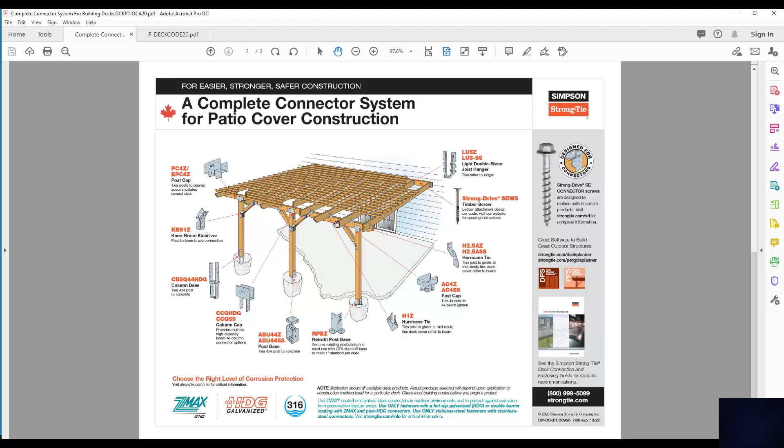So these different connectors, and I throw this in now, even though you're not going to really specify this until much later on, you have to become familiar with these connectors. What do each one do? Like a standoff post base goes from the concrete sonotube to the post. Now, you may not have a post here. You may have it right onto a beam. So it requires a different type of saddle connection for that type of assembly.

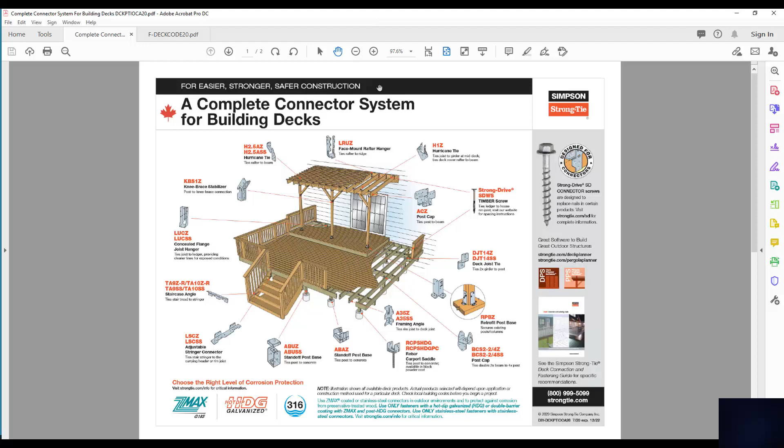Then we have our framing that goes from, let me zoom in on this so we can see it a bit better. We have our framing that goes from the joist directly to the beams, sitting on top. That's the one detail. The detail I was talking about earlier is we're actually going to have joists that come right into the side of the beam. So the two decks rest one on top of the other, but they actually don't. They're connected to the beam in two different ways.

So the connection down here is very similar to what we do at the house with the ledger connection. And the house connection, once again, has its particular elements that you must be aware of. There's connections with how we deal with handrails. Now, I've got a separate document for that. It's the exterior guard detail document called SB7. It's generated by the province of Ontario, and it's basically cut and paste.

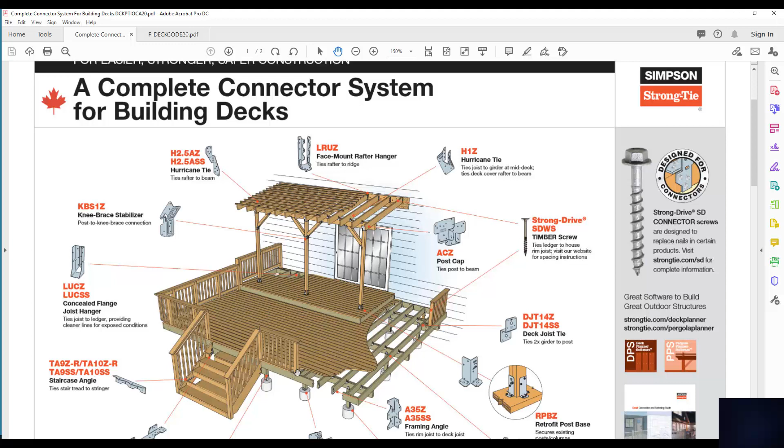You pick your different elements and you cut and paste the PDF file into your drawing, and you're done. And it meets specific guidelines. Now, Simpson Strong-Tie has connections as well, but we're not going to use that. We're going to be using the SB7 document. That's also part of Lesson 5 documentation.

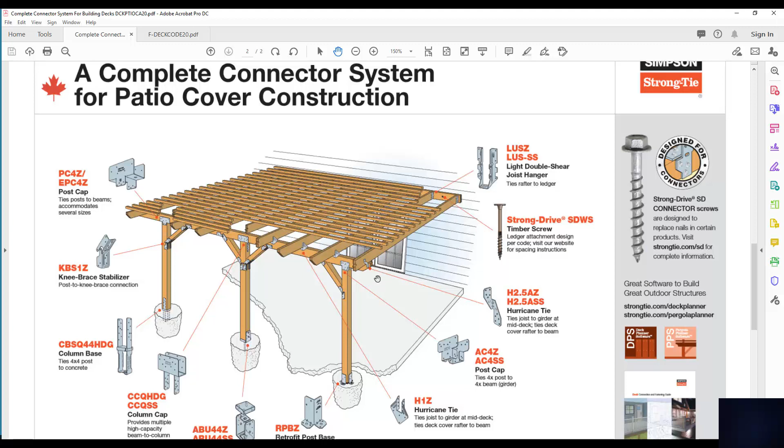And then down below here, let me just scroll up here. We also have different connections between posts and beams. These are another type of ledger, as well as when we get into the pergola. Now, some of these are really not attractive, let's just put it that way. But they do have a whole section in their catalog of very attractive connections as well, and that may be something that we'll look at decoratively.

You can see here where we have a step. I used in my example coming off the dining room, I have a step. Basically, you're building a deck on top of a deck, that's all. And that's what they've done here as well. So we'll look at that.

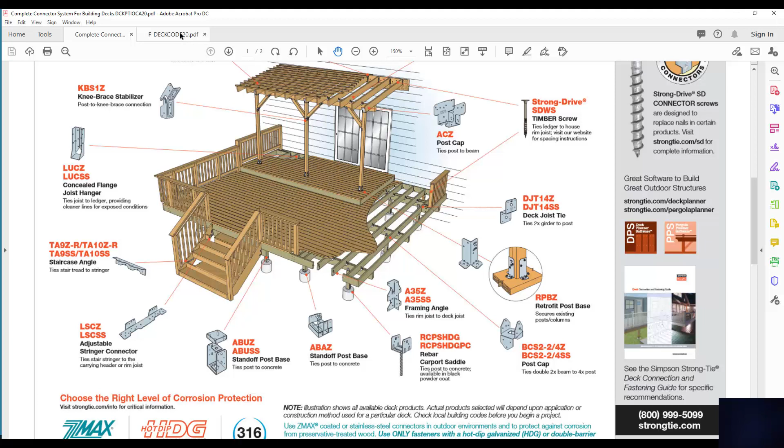The other document I've provided here is called the F Deck Code 20. So it's a brand new document for 2020. And again, it goes in a bit more detail with the connections and what they do. You don't have to study this, but you need to be aware and familiar with all the different parts and pieces of it, because we'll be looking at them, and eventually in your final project you'll be specifying them.

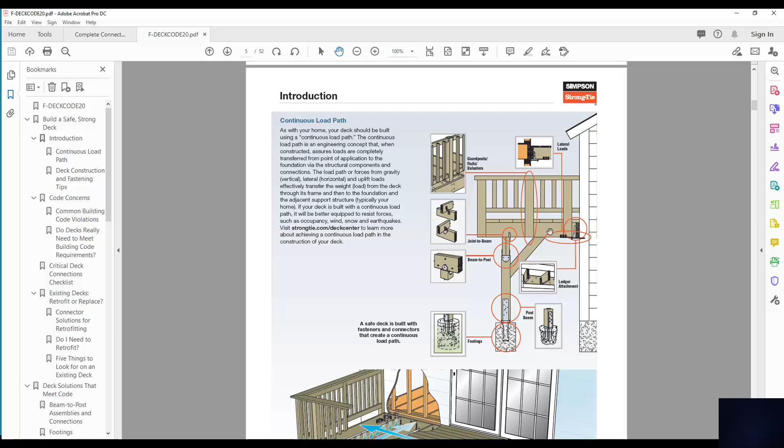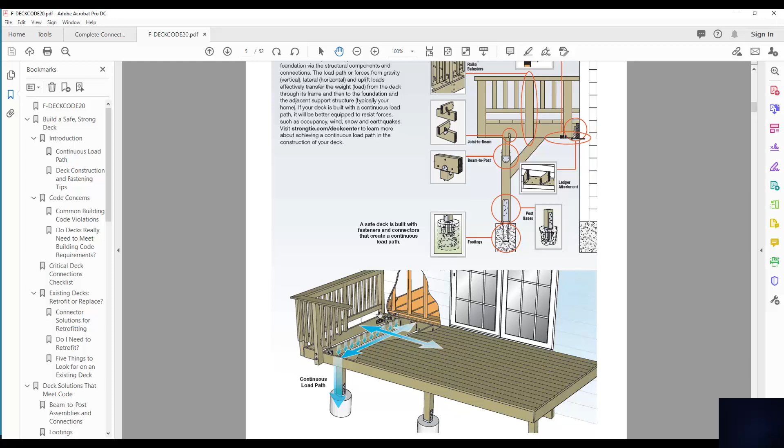So a lot of this I'm showing you now as different visual effects of the deck. We have to become very familiar with the three-dimensional aspects of the deck. So for instance, the board that runs along the house is called a ledger. The board that runs along the front as well as the side, we're going to call rim board. Sometimes there's a couple of different names for it, but the rim board is basically, as the name would describe, the outer rim of the deck.

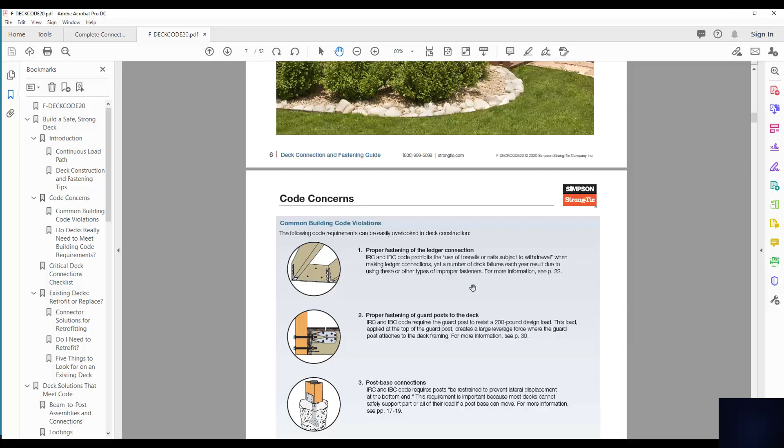And the interior components are the joists. So you can see here very clearly that this inner joist and the last board are exactly the same. So we do floor joist calculation for it, but the outer two floor joists are called the rim board. And you'll see in this document, like I said, it's far more precise. It gives all sorts of details of different connectors, including the one towards the house. Like I said, we're not going to spend too much time on that.

You need to understand that this connection, though, is extremely important, because what you're basically doing is attaching the deck to the house, and the house is acting like a beam. So when we do our calculations, where we looked at the last example, we know that the 2-foot overhang is part of the calculation for the beam underneath it. But the rest of the joist itself, we were dividing it in two, and the one half gets attached to the beam that you see. The other half gets attached to the house.

Now, there's no beam calculation for the house. The house is strong enough to carry any of those loads. It's designed to carry the maximum load, as long as this joist is less than 16 feet wide. So it's more the connection that we're concerned about than the actual structure of the house, whether it's strong enough to support it. It is. So that really doesn't become part of the calculation. But we do have to calculate halfway along that length and the overhang for the beam that supports underneath.

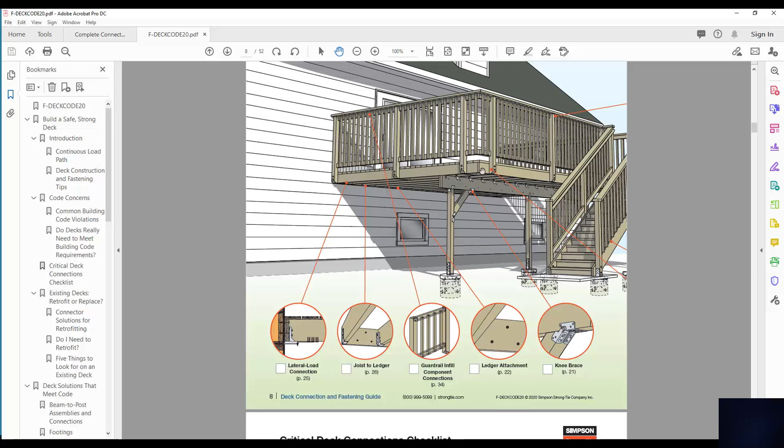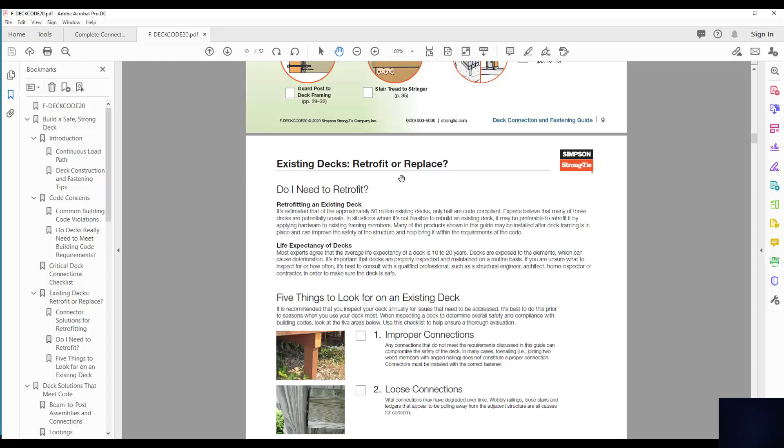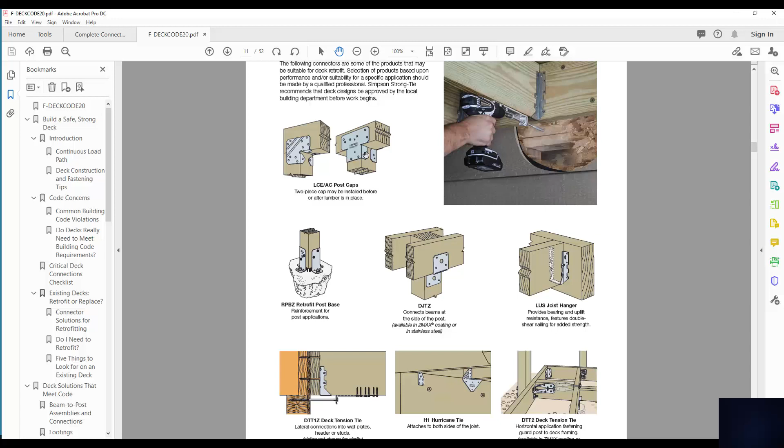So once again, these three-dimensional images will hopefully help you visualize what it is we're going to be doing with our project. And there's other things like cleats for stairs, steps, offset posts, but it's a good document to go through and become familiar with, because it has all the different deck connections, and most of these you can buy at Home Hardware, Home Depot, Lowe's, or anything like that. Their boxes are actually labeled Simpson Strong-Tie, so you should be able to find each and every one of them. They also have a software.

Now, I haven't explored the software, but regardless of a software that automatically does a lot of this calculation for you, you need to understand what the parts and pieces are before you can move on and use a software of that nature. So once again, this documentation is for your review. It's to help you further on in the project with how to actually make all the connections as part of the documentation and include them in your drawings. I'm going to show you how to go through the process. You know what? I'm going to pull that up right now.

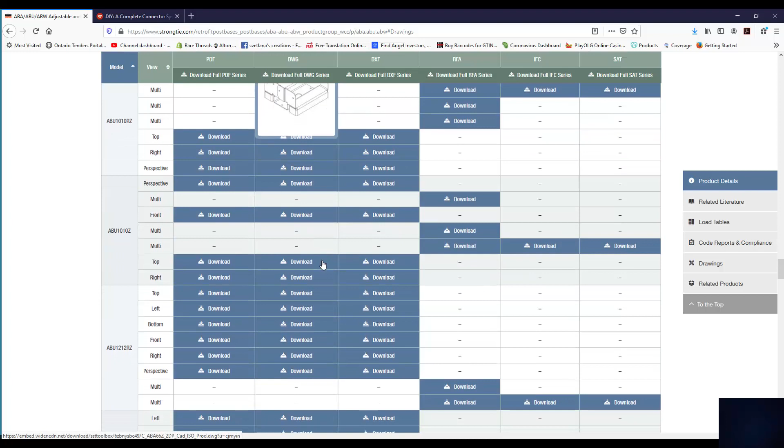Let's see here. So once you define a connector, let's say for instance you're connecting a beam or a joist to a sonotube, you'll then look it up on their website, and here's the connector there. And then on their actual website, they have CAD drawings. So if we click on the CAD drawing, we actually have the drawing specific to that particular item. So I know that I was looking earlier, and I want a, I think it was an ABZ 8.

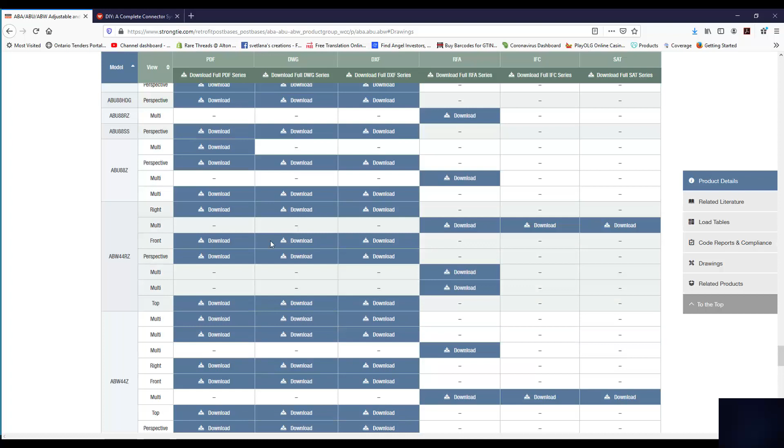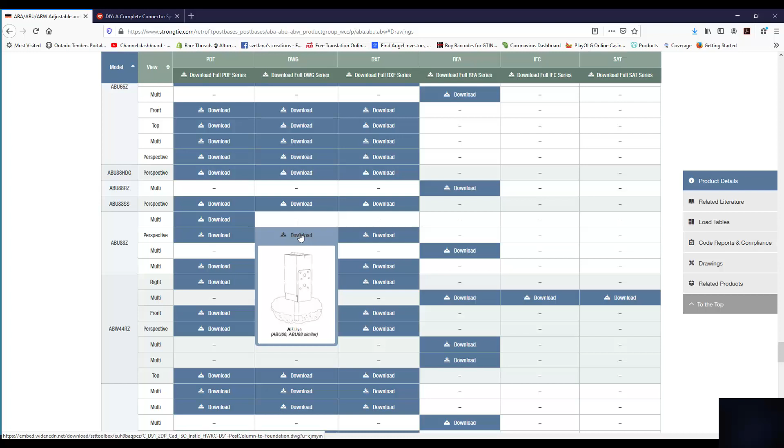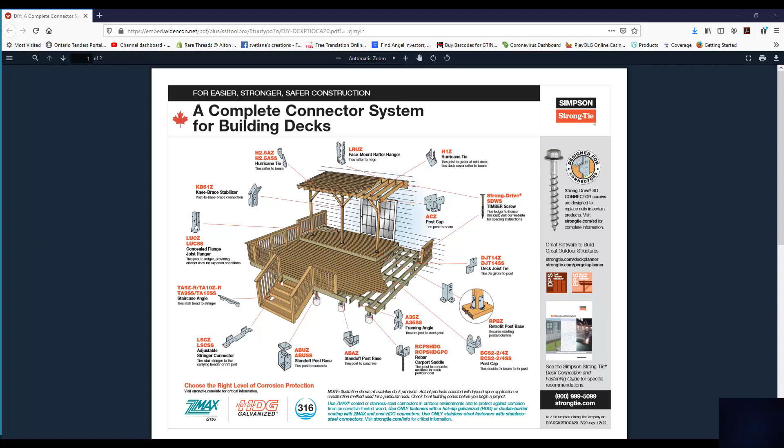And it's just a copy and paste, as we've used before in the first year of the CAD program. So we're going to look at that later on, but just be aware that it is here. Why am I doing this now? Because I want you to become sort of familiar with repetition of all these different elements that we're going to be looking at through the program.

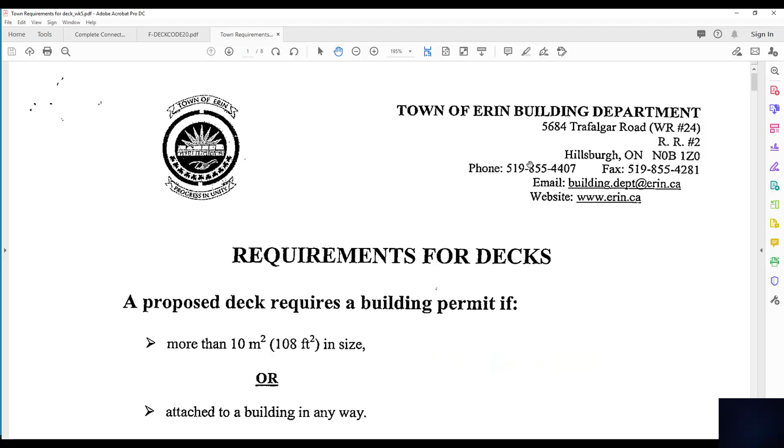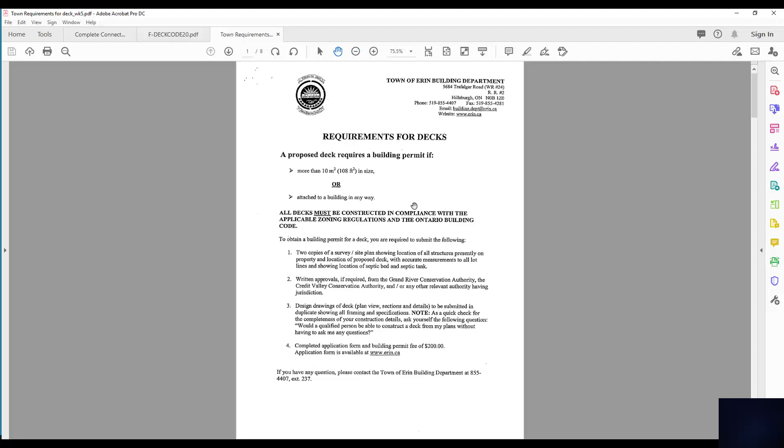So I'm just going to come into here and show you a typical town requirement. In this case it's just Erin, which is close to me here. If you go to the local building department, they'll tell you what they're expecting in their permit set. So this is giving you the minimum requirements before you require a permit and all that, and then showing you how to lay out the deck. This is particular to decks and exterior guards.

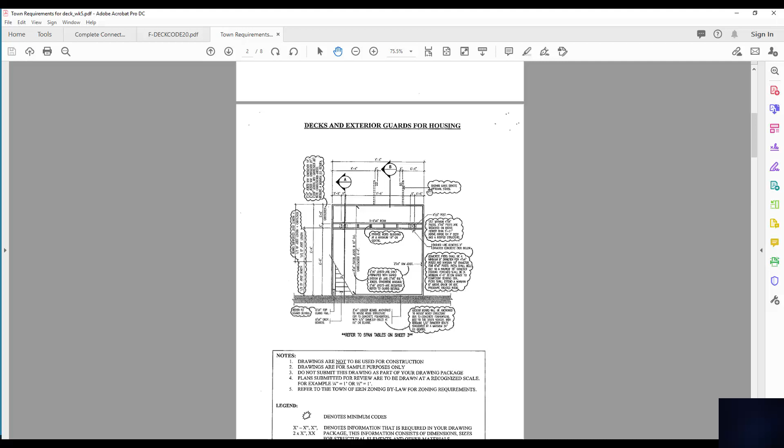They're looking for the framing, how we actually note the framing, the sizes, the drawings, the sections, the elevations, anything to do with staircases. So this is the level of information. Now some of the details here you see are actually from another document that once again you cut and paste. So we don't have to spend a lot of time drawing this, but we do have to spend the time to actually find it. So this is the town requirements, looking at the exterior guards and decks for houses.

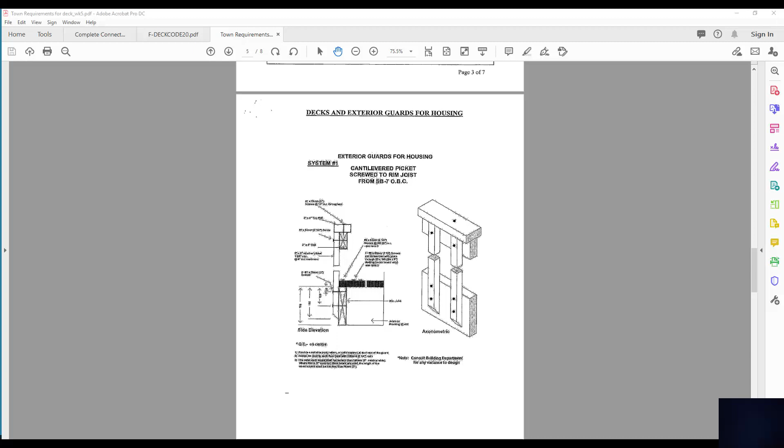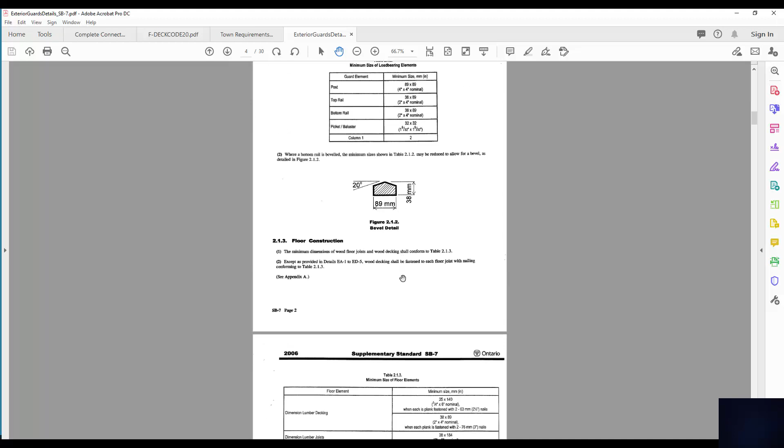I've also included in Lesson 5 the Exterior Guard Detail SB7 document, which looks like this. And this one, it's not that complex to go through. It's basically a series of tables and charts that you then decide based on your spacing what you're going to pick. So I'll give you a very, very quick example. Once again, we'll do some more detail on this later on.

This talks about rails, handrails, posts, infill pickets. So you've got an EA document, an EB document, and an EC document. You have to have one of each. And the one talks about the rails, one talks about the posts, and one talks about the pickets.

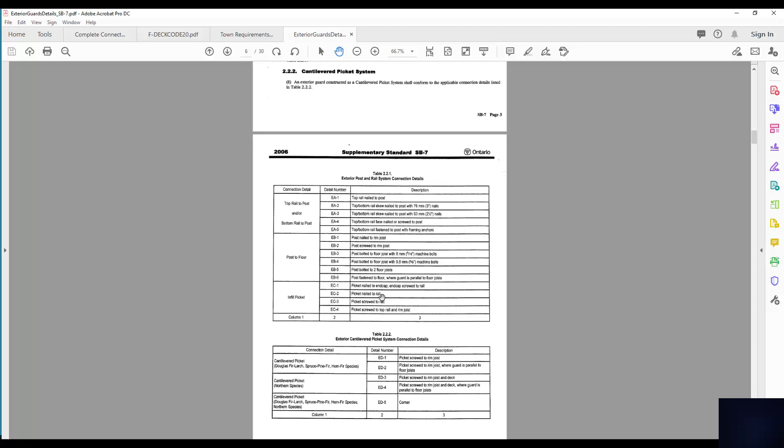And so depending on your spacing that you have on the deck, like here's a very simple one, and I wouldn't expect you to pick an EA1 document because this is so simplistic. It would really look horrible on a deck. So let's pick something a bit more interesting. Let's go down into an EA3 document.

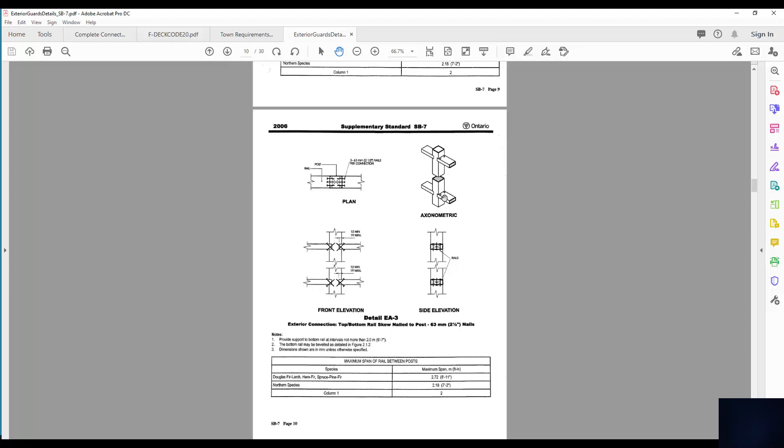And this example shows you that you can actually have spans of up to 8'11". Now, SPF lumber is the one we use, spruce pine fir, and that's why I went to 8'11", not 7'2". 7'2" is northern species, which we don't have available here. But this says I can have posts at maximum 8 feet 11 inches apart if I use this design connection. So that would be our EA document, how the connection looks and works.

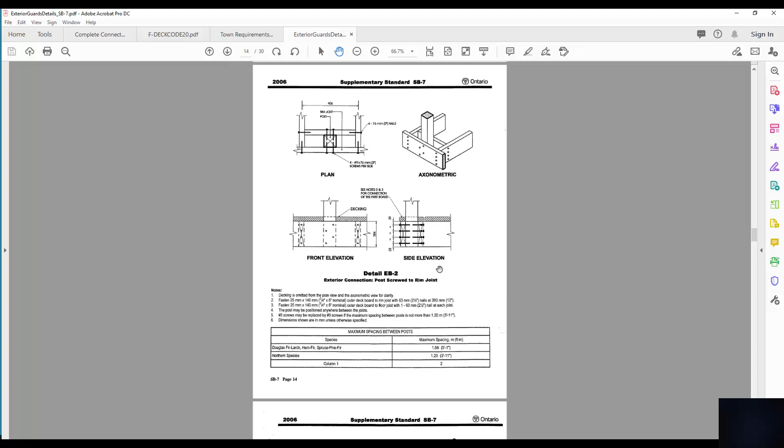And you don't have to do anything, like I said, in terms of a drawing. Just copy and paste this basic PDF file right into your CAD drawing, and you've now spec'd how the posts are going to be connected. And whether it's for posts or screens, you're going to use a similar system. And there's examples for different applications, different installations. Some of them have larger spans, some of them have smaller spans.

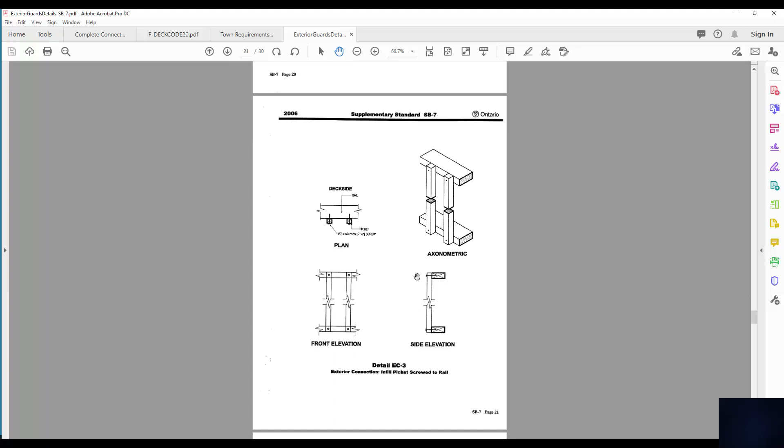So you define your handrail, you define your posts, that's in this section, and then you define your picket arrangement. So you may look at this and say, I want pickets that look like, for argument's sake, this one here. So what is this? This is an EC3 document. So you basically have 3 different pages, cut and paste into your final example. So I've included this here. It should be reviewed. All this information you should go through to know where it is, because when the time comes to actually do it, you won't have a lot of time to find it and paste it in.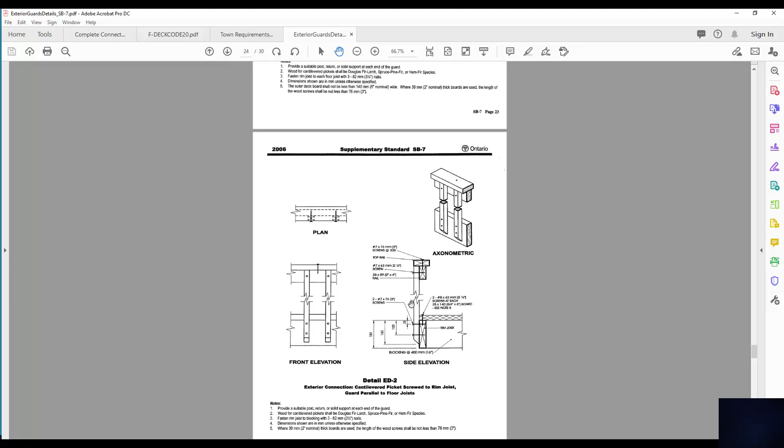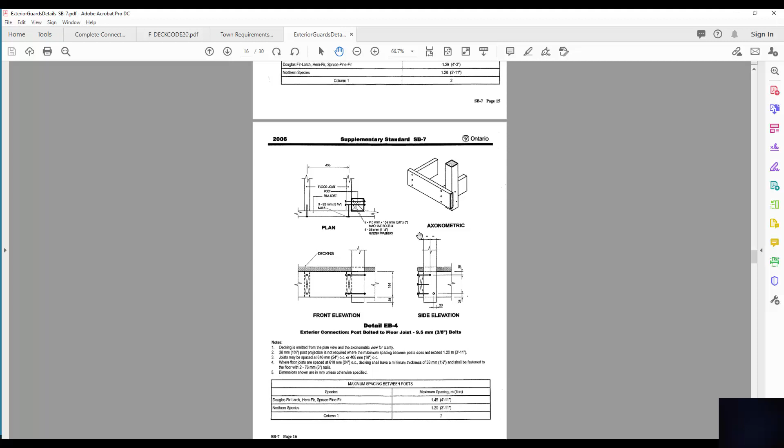But also, as we're framing, we have to think about these things. We have to think about all the different elements. It's like any course. The second time you go through a course is much easier because you've got all the parts and pieces. Well, we need to know what is kind of available to us, or if we're stuck on part of the problem, where to go to find an answer. Even though we're just framing at this point, we have to understand how we'd frame all these different elements together. So I'm going to close this down, and I'm going to close this down, and we're going to go back to this drawing to talk about framing.